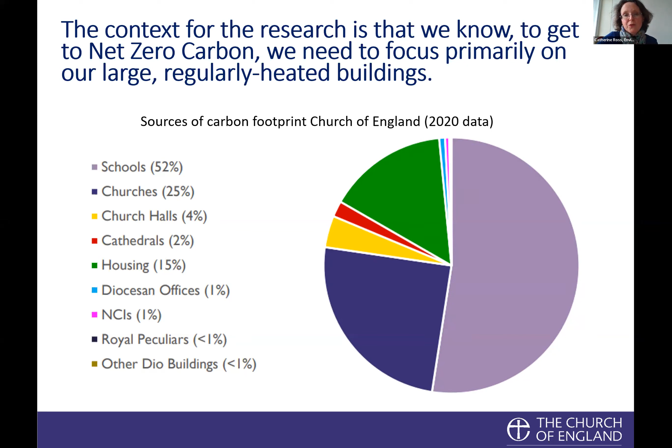Within that, it's really important to remember that the main source of our energy use is our heating. We know from this sample of churches and church halls, 84% of their energy use—that's electricity, oil and gas—was for their heating.

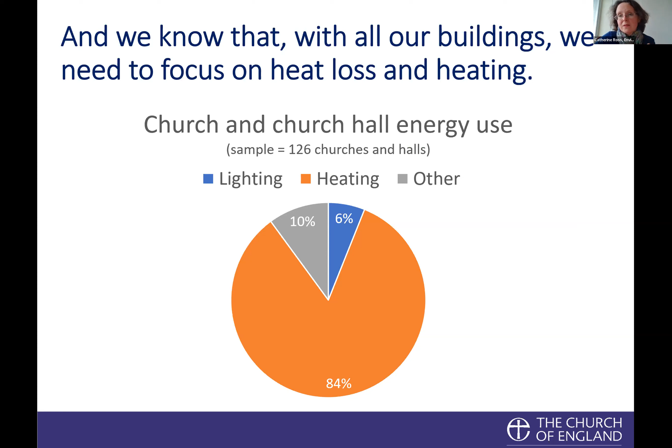All of that background knowledge about the Routemap, about needing to focus on our highest energy use buildings, needing to focus on our heat, that was what led us to start the Wayfinder project. We nationally commissioned this piece of research, commissioned by the Environment Programme and carried out by Matt and his colleagues from Inspired Efficiency.

What we did was we chose a sample of 12 buildings from around the country, which we chose because they were high energy use, big, busy buildings. We chose 3 secondary schools, 2 primary schools, 4 churches, a Theological Education Institution, and 1 of our diocesan offices. With the churches in particular, although with all of the buildings, we looked for a mixture between rural and urban, and we looked for a mixture of geography, north and south, to try and have, whilst it's a small sample, a useful and representative sample of our highest energy use buildings.

Not our typical small rural churches, deliberately looking for what are those highest energy use buildings, because we know that if we can make savings there, there'll be really material savings.

And just to really bring that point home even more strongly, bear with me. I know this is a slightly complicated slide, but it's a really important one, so I wanted to show it to you. Each of these bars is a particular building.

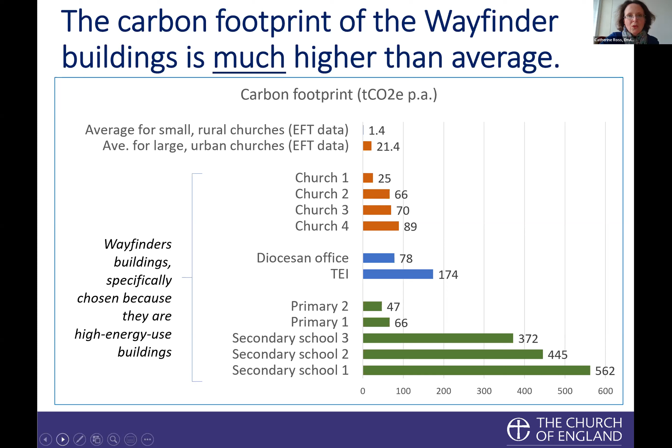That, I think, is everything from me. So if I stop sharing and hand you over to Matt to get us going. Tell us what you found out, Matt.

Excellent. Thank you, Catherine. And good afternoon to everybody who's joined. It is fantastic that so many of you have taken an hour out of your day to hear these findings, and I hope that will be a useful hour to you.

It's certainly been really interesting going around these, as Catherine says, large energy using buildings on the Church of England estate and seeing what can be done, just to get the technology to work. So this was the Wayfinders Project.

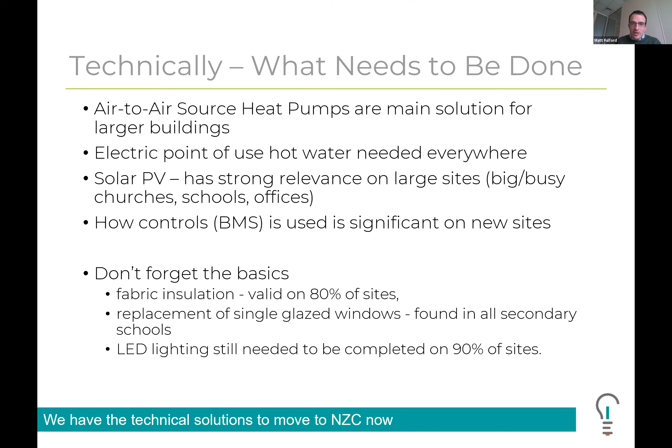So technically, that's really what needs to be done. One slide, it's maybe as simple as that, but there are obviously a lot of challenges on the way. I thought it would also be useful to touch on, actually, what did we find was less of a priority?

We were trying to look at the wider carbon footprint of the Church of England. So we did look at transport, and we were asking the sites about how people were getting to their buildings, what sort of transport they might have done during their normal operation, be that a school or the church or the college or the diocesan office. And we really found that actually the transport impact was really very minimal, possibly actually more minimal on these larger sites, which tended to be better connected to public transport than perhaps some of the smaller sites. Maybe something we need to test there.

Really the only significant elements of transport that we found which were under direct control were actually school minibuses. Most of the secondary schools have minibuses, and almost all of those were diesel minibuses. So that's definitely an area within transport to focus on. But I'd say transport overall, very minimal - a lot of people walking, cycling. You can see there the picture of the main transport for the TEI I went to, which is a very large bike store. But what also could be relevant around transport is actually making sure we've got electric vehicle charging points where they are relevant, and certainly within schools and for the staff that do need to travel and commute by car, that is relevant. But really, transport overall is not a high priority.

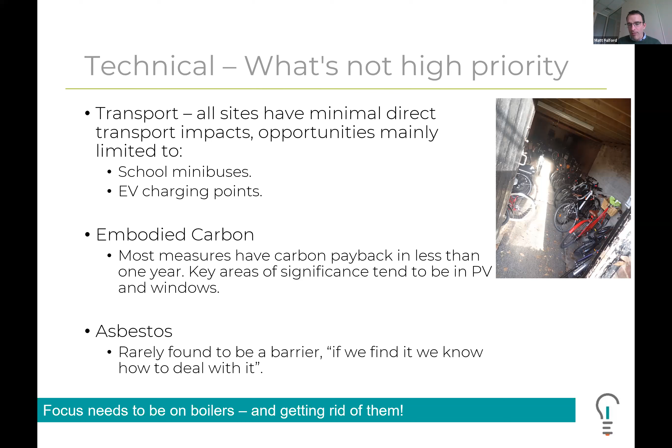So those are perhaps the things we could be a little cautious about saying we could relax on, but they're certainly not the main high priority focus. Where our focus needs to be is on the boilers and getting rid of gas and oil boilers - that's got to be our primary focus to achieving net zero.

We very much looked at what the costs were to achieve net zero within these buildings, and remember what Catherine said earlier - this is very much looking at the cost within our largest energy using buildings. This isn't our normal hundreds, thousands of small rural churches - that's not what we're looking at in this project. This is for those really big energy using buildings out there. And this isn't to make the entirety of those buildings, or in some cases campuses or estates, when looking at secondary schools, into a net zero carbon site.

So what we found, you can see the total costs. Secondary schools getting up to around £950,000 per secondary school to completely convert from where it is at the moment into net zero carbon. Primary schools, obviously much less since they're smaller, coming into about £350,000. Then diocesan offices, and actually a big, busy, daily used church, again around the £300,000 mark to do the complete replacement.

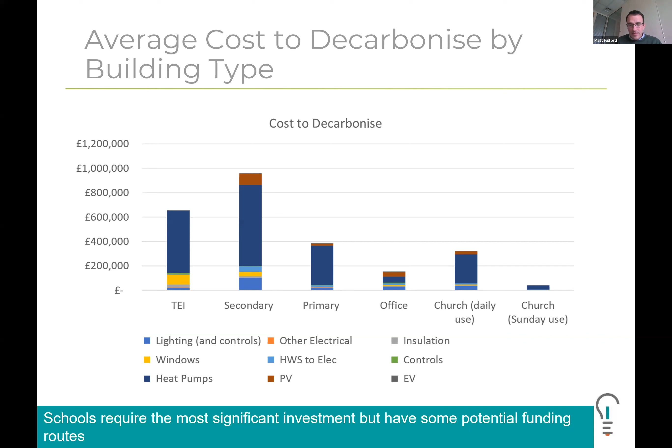But the one church we did have that was still a high energy using church, but actually mainly a Sunday used church - very much less than that, we're looking at sort of £30,000. That correlates to some other work we've done outside of this as well. So you can see there's a massive difference in the scale of that - significant investment is needed. Schools massively need the most significant investment, but fortunately they probably have some of the more reliable and potential funding routes available to them.

When we look at those costs and split them another way - rather than by building, splitting them by technology - what is it we need to spend the most money on? It's quite clear from that graph, blindingly obvious, that it's the heat pumps which are by far and away the largest element of cost where investment will be needed. The other areas, there's some money to be spent on lighting, but that's just because there's a lot of it still to do. Windows are relatively more costly than other forms of insulation, but they all very much pale in significance compared to the cost of the heat pump.

But the good news, almost, if there is any in that, is actually heat pumps are rather expensive at the moment, but are expected to fall in cost.

We're seeing, if not on a weekly basis, certainly a monthly basis, new products around heat pumps coming out all the time. Each one is incrementally better than the previous one.

We're also seeing initial signs that the skill base needed to install those is starting to increase. We've got an issue at the moment where we've got way more demand for installation of heat pumps than we have supply of skilled people. But that base, particularly existing boiler engineers, are beginning to reskill to install heat pumps. You've probably seen that anecdotally on the sides of the vans of the person that services your boiler, perhaps starting to say heat pumps on them as well.

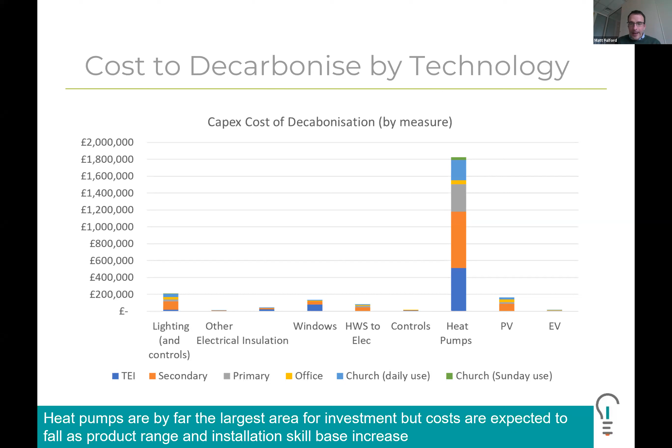So that's starting to happen, and we're expecting the costs in those areas to fall over time. It's a very high cost at the moment, and will probably always remain the most significant area for investment, but it's expected to drop over time.

The other area I wanted to look at was the cost savings, and the cost of doing it, as well as the carbon saving of doing it. The annual cost savings, where we're going to get the most financial saving from installing this, is actually within the lighting and PV. That gives us the best payback there, that's where we're going to deliver the most savings.

Heat pumps, I'll say at the moment, with the energy prices we've been paying in the last six months to a year, aren't necessarily delivering a direct financial saving in all cases - I'll come on to that later. But you can see with the graph on the right, that's where we're getting our biggest carbon saving from. So heat pumps on their own don't necessarily deliver a financial saving, but they're really massively needed to deliver the carbon saving. It's the lighting and PV that deliver the biggest cost saving, but they deliver a much lower carbon saving.

What was interesting was going back and looking at all of these buildings we looked at - every single one, when you looked at it as a complete program of measures, not just isolating out the heat pumps or the lighting on its own, but the complete range of measures needed on those buildings - every single building we went around, if you did everything, would result in a cost saving in the annual operation of that building. So there are financial savings to be had here.

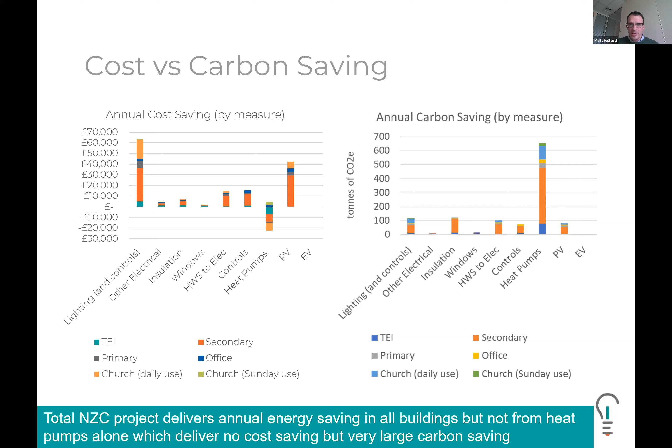Now, what was also interesting is going around and having a look at these high energy user buildings - some of them haven't really done a great deal yet, and realizing that actually we're already doing this. This isn't new stuff.

We've got biomass boilers on our estate. We've got air-to-air source heat pumps, as you can see in the picture there. We've got electric hot water heating - that's in the form of a more centralized tank, but we've got plenty of little ones stuck under sinks everywhere as well. We've got ground source heat pumps. And these aren't pictures I've just gone and found on a search engine - these are all pictures I took whilst doing the 12 energy audits of this sample of sites. These exist even in these sample sites we were looking at on the Wayfinders program.

So this technology may sound new and novel to many people, but actually we're already doing it. We don't always realize that what's heating or cooling that building could be described as a heat pump, or that the hot water from the tap in that classroom or sink is heated by electricity, and that's a good thing. It's out there, we're doing it, this is known and common to many people, and perhaps we need to shine a greater spotlight on where we're doing it and doing it well.

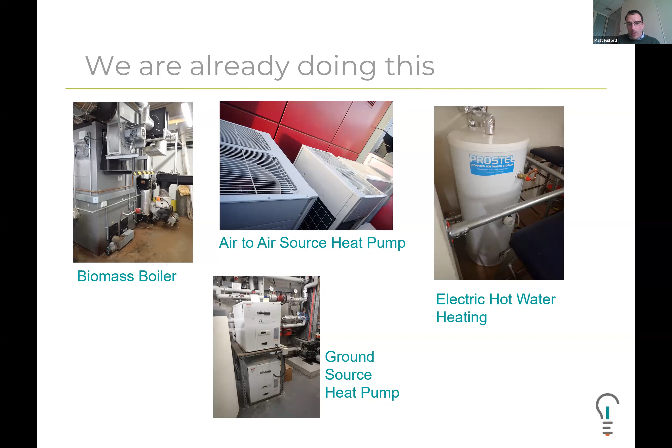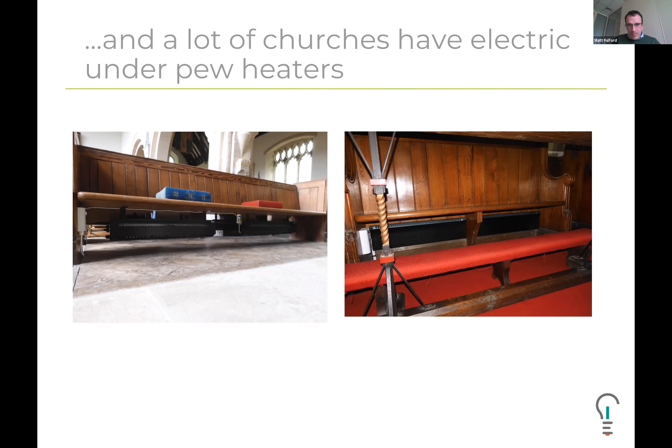I just wanted to mention, we've got a lot of churches that have electric under-pew heating, and that's what we're seeing as needed for the smaller churches out there. That one Sunday-used church we had in the programme, this would be the most suitable heating solution for it. So as well as all the bigger stuff in our larger energy-using buildings, we also have solutions for the smaller ones, and these examples are fairly widely distributed around our church estate for going electric heating.

So we can do this, we've got the technology to do it. In fact, it delivers a cost saving when we do it, albeit we may have some long paybacks within there. And we're already doing it on parts of our estate, we already have the knowledge. So then the question arises, well, why aren't we doing this everywhere?

This was another area we very much examined with the sites we went round to, asking what the barriers were. Initially, all of the sites had heard of the 2030 net zero carbon target the Church of England set, and every single site was really supportive and engaged around that. They all want to do their bit. There's a quote from one church saying there's no lack of will and determination to do this. So I think in many cases, the hearts and minds piece is an open door, we've probably won that battle if we put it in those terms.

It doesn't seem to be that people are going, oh no, I don't want to do that, I'm not interested. People seem to be very interested around it, and I think that's a testament to how many people have actually joined today's webinar. You're clearly interested in this, and that's very much what we found.

The biggest issue, and I suppose this won't be a surprise to anybody, is how do we pay for this? So I think that's really useful to hear from Catherine about the funding webinars coming up, because that was by far and away the biggest issue. Many people across all ranges of buildings go, give me the money, we'll do it tomorrow. Now, obviously, they'll probably need to go and fundraise rather than just be given that money parachuted into them. But that was clearly the biggest issue out there, financing it.

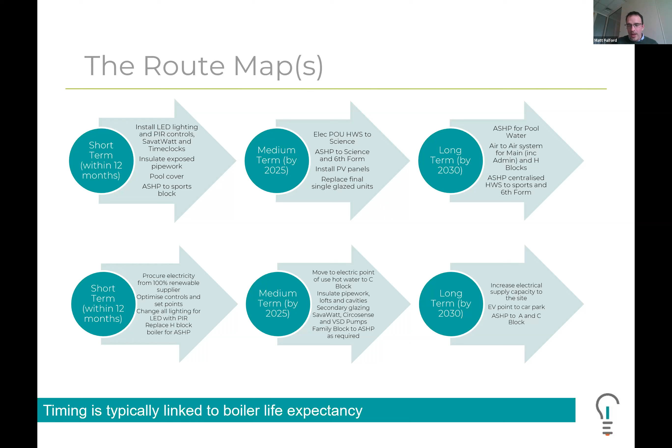So it's when that boiler needs replacing that is the main driver out there. There are some human barriers as well, so this is where we need to work very much with people rather than with the buildings. I've talked about those competing priorities and the lack of budget, but also having that clear technical knowledge of what needs to be done.

Now, obviously, we've delivered that for these 12 sites. They've got those route maps you saw on the previous slide, and they've got an audit report that very much says what needs to be done. So they now can go forward and say, look, when that boiler fails, I know I need to replace it with this solution here, I need to do that bit beforehand, and they have that route map going out there. But that's clearly a bit of knowledge that needs to be put in place.

And another confidence piece is knowing that it's going to get the support of the diocese, be that within the DAC or within the schools teams, that yes, this is something we want to support and we'll help you through that. And knowing that there are funding solutions out there, those are really the bits that are needed. Many people would love to have that pot of money just given to them, but even when you unpick it, knowing that it can be funded and these are the funding solutions - yes, you've got to go and work hard at the fundraising, but those routes are available and open to them.

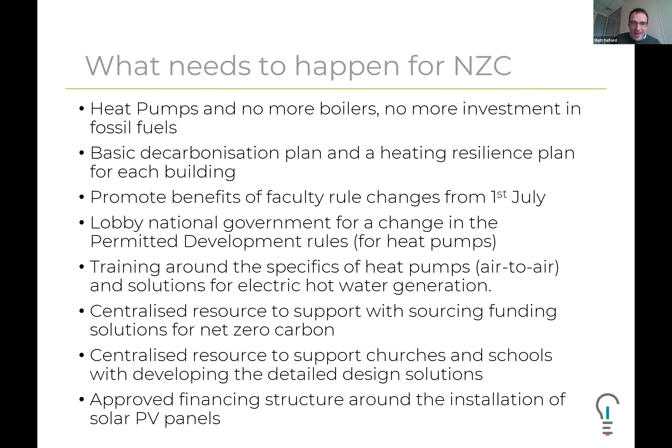One of the things I said we particularly needed to do was get some training around the specifics of heat pumps. So I thought, well, there's no time like the present - I've got you for about the next 5 minutes to run through very quickly some awareness around heat pumps and what they are.

You've probably heard of heat pumps, and you've probably heard of ground source heat pumps, which involves stuff going into the ground. You've probably heard of air source heat pumps. What you probably haven't heard of is that there are different flavors of those in between.

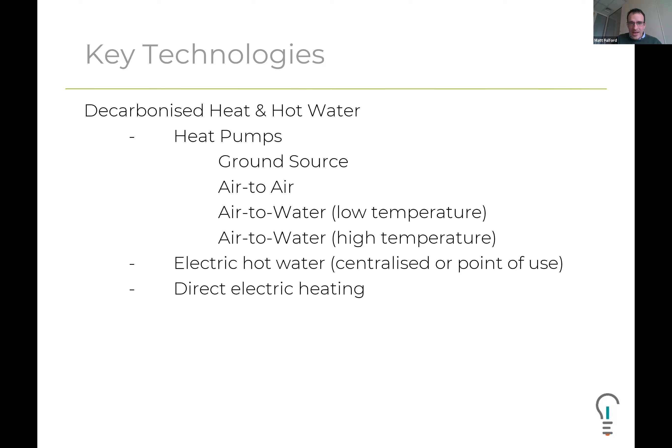So very quickly: ground source heat pump. You have something that goes into the ground - often now it's a deep drill down in piles - which extracts the heat out of the ground, compresses that, and puts that heat into the building. It works really well with underfloor heating systems and in new buildings, but it's incredibly difficult to get into existing buildings, particularly our churches, which have ground with lots of archaeology in them. So perhaps not so good for that.

Now, all heat pumps have a measure of how efficient they are, called the coefficient of performance, abbreviated to COP. That's measured over a whole heating season or a whole year, so it becomes a seasonal coefficient of performance, or SCOP. That is a ratio of how many units of electricity you need to put into the heat pump to get how many units of heat out.

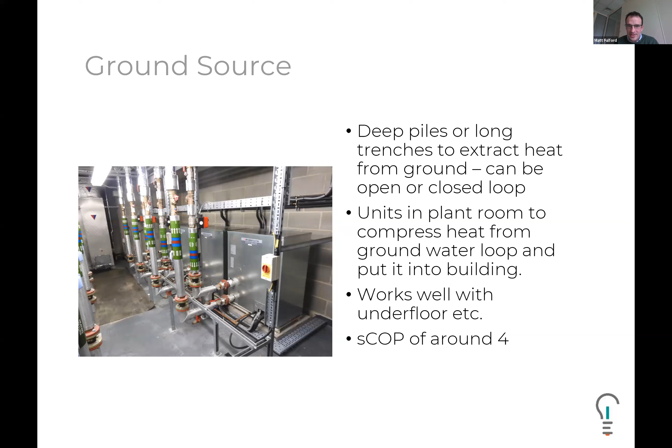So if you give it 1 unit of electricity, the pump does its wonderful stuff, and with a ground source heat pump you'll get 4 units of heat out for that 1 unit of electricity you put in. So that's a coefficient of performance of 4 - in other words, 400% efficient. Compare that to a gas boiler, and even the best gas boilers are only about 95% efficient. This is 400% efficient, so you can understand why it's a good and well-promoted technology.

Then we look at air-to-air source heat pumps. I said this is really probably the mainstay of what we need to be doing. This is what they look like on the outside of a building - they probably look familiar because you recognize them as air conditioning systems. Most air conditioning systems can heat as well as cool, and this is what these do. They're very, very similar - in fact, almost exactly identical to air conditioning systems.

When you install an air-to-air source heat pump, there are just a few technical little bits of control system on it, which means that it heats as its main thing and cools as its secondary thing, rather than the other way around. But basically, they are exactly the same.

They take heat out of the air, they compress it into a refrigerant gas at the external unit. They put that refrigerant gas into the building, and then you have units inside the building that can push that heat into there.

The coefficient of performance around that is 5, so even more efficient than ground source, so 500% efficient. They can also cool. That's quite important actually for a number of our schools where they do suffer from overheating on a few days in the summer as well.

Because they also have blown air, they can rapidly warm up spaces. So they've got a warm-up period of around about 20 minutes into most rooms. If you think about a classroom or a hall, probably a little bit longer for very large churches, because they've got greater air volume. The external units, you can see here, there's one on the flat roof of a school, or they can go down at ground level and be covered up, as long as they've got airflow through them.

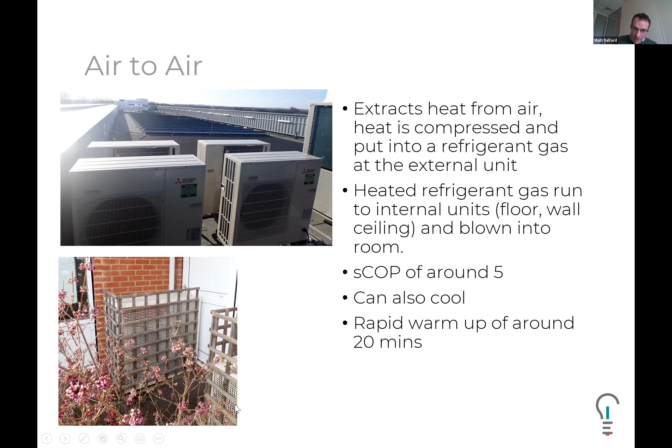This is a unit, and you've got another one just off the edge of this picture, actually the primary school that we went to there.

Internally, a lot of people worry about what they look like internally, because you'll be very used to seeing these sorts of systems, the plastic white boxes on the wall with the little louvers that move in and out, or actually hidden up behind suspended ceilings. And these are very relevant actually for our schools.

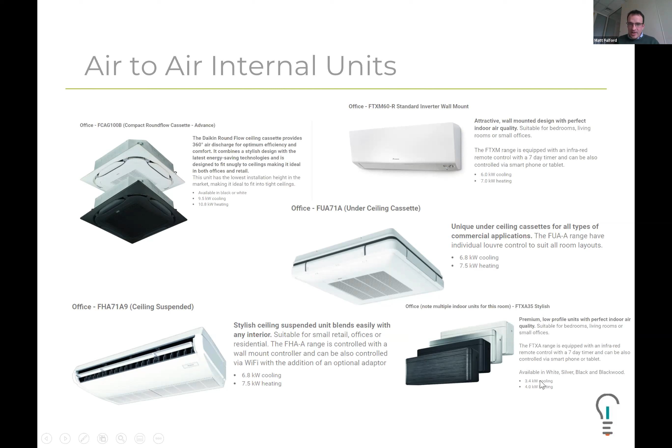These sorts of solutions hidden up in suspended ceilings work really well. In little offices, these things again fit in quite nicely. You can get some more elegant looking units now, which just look a little bit nicer as well. But it doesn't all have to be the horrible lump of white plastic stuck on the wall.

We can also get internal units for air-to-air systems which are floor mounted and look very much like fan convector radiators. So you probably walked into that building, into this room, and thought that was just a normal radiator on the wall. In fact, that's the internal unit of an air-to-air heat pump. So that's available - you can see different makes, different models out there.

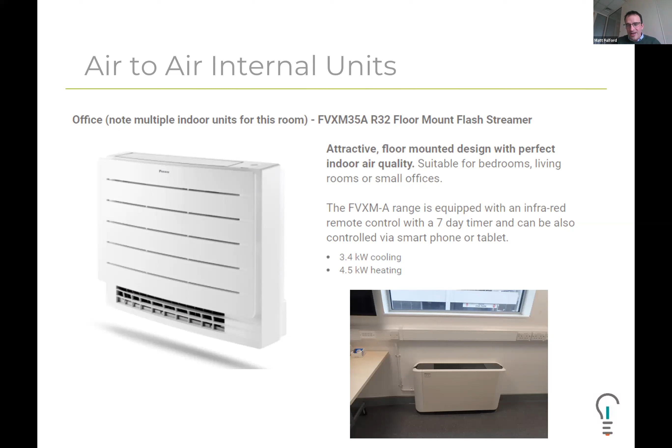So they don't need to look much different from a radiator. And that's quite important when we come into churches, those large churches where they may already have radiators down the wall, and we can replace them with these without the appearance changing massively.

Air to water, very quickly on that - this again is an air-to-water system installed at a school. That takes the heat out of the air, and it compresses that heat, but rather than putting it into a refrigerant gas, which is what the air-to-air system did, it puts it directly into the water system that then circulates around radiators. It's very good at producing water up to around about 50 degrees.

After that, a normal air-to-water system will struggle a little bit. You need good flow rates around a heating system. So if you've got small bore pipework, or single pipe systems, which we do still have, they ain't going to work. They need to have much better flow rates within that.

Most of the plant is outside. You can see here, very minimal plant inside - just a bit of pipework and a few pumps and a few control panels on the walls. No major plant inside at all, which can sometimes be helpful.

But actually their coefficient of performance is much less - so that's about 3.5, about 350% efficient. Compare that to air-to-air, which is 500%. You can see why air-to-air is perhaps coming to be more relevant.

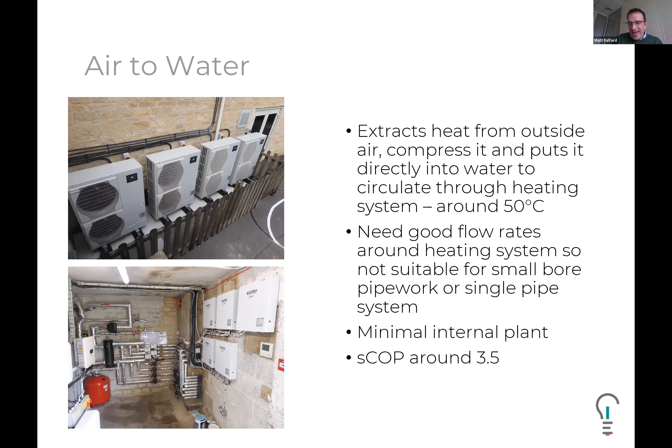You can have high temperature air-to-water systems. One of the major failures on the earlier one was actually it only produced water up to around 50 degrees, and within a lot of our radiator systems, we need hot water that's hotter than that.

So you can get high temperature air-to-water systems that produce water up to about 75 degrees. It's got a secondary cycle, so it almost goes through two versions of compressing the heat within the heat pump part, but that reduces its efficiency, bringing it down to about 2.5, or 250% efficient.

It is easier to integrate with existing radiator systems, but it does need internal and external space because you've got two elements going on: the heat pump itself, and the internal unit which gives a secondary boost to get that temperature up. So you need both going on, and they do tend to be rather more expensive as well.

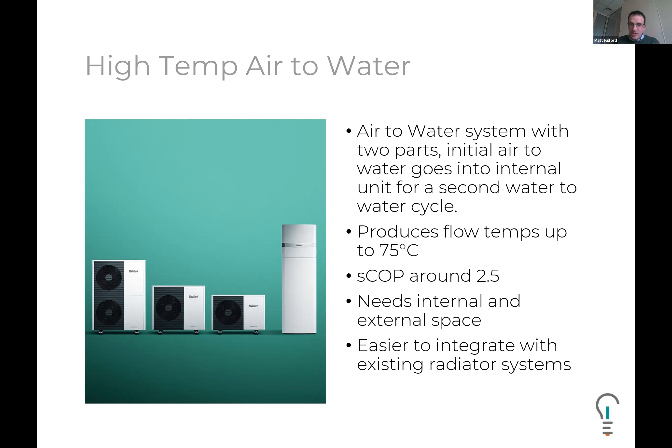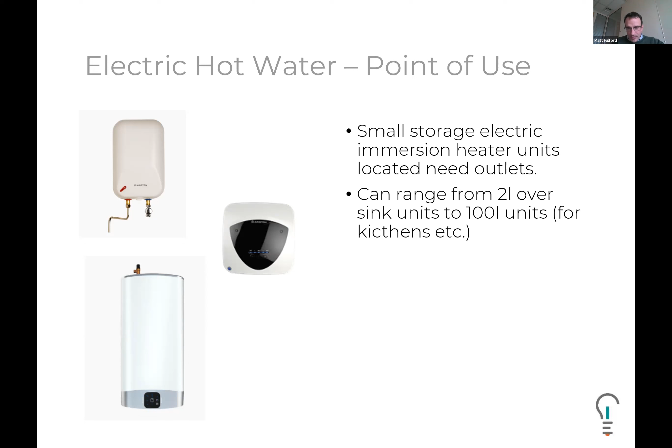So they're still relevant, still part of our toolkit, but less efficient and more expensive. Electric point of use hot water heaters, you've probably seen them - this is what we need to have everywhere. These units, hidden underneath sinks, range from just a few litres, useful for a wash hand basin or small sink, up to 100 litres, much more ideal for big commercial kitchens in schools and offices and the like.

You can also get instantaneous ones that just heat the water as it flows through with no storage at all, which is obviously very good for Legionella.

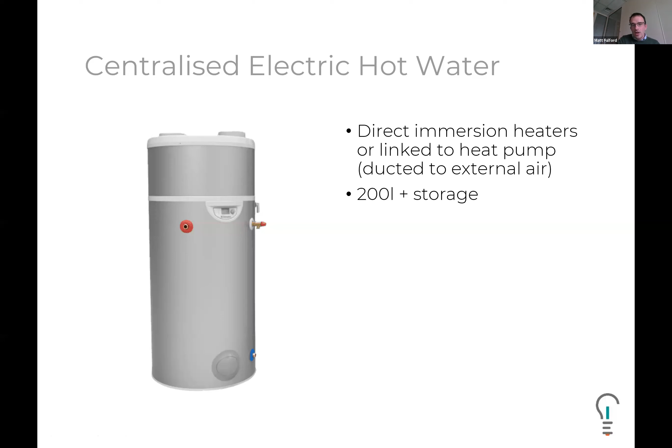And you can now get centralized electric hot water systems as well - a normal tank as we're used to seeing, but the top section of the tank, just above that light grey line, is actually an air source heat pump. So you've got a packaged unit, a cylinder of hot water with an air source heat pump on top of it, ducted in the same way as a flue would go out to external air. That can go directly into plant rooms, which is really useful where we've got lots of showering going on, like in sports blocks, and we need a large volume of stored hot water. So we've got those solutions out there as well.

So I thought I'd just run through that very quickly. Hopefully you'll forgive me for taking a few minutes at the end to go through that familiarization of heat pumps.

Just as a reminder, even with the broad range of buildings we've got, the range of ages, listings, styles and everything else, we've got the technical solutions - I've just described those main ones that we need to deliver net zero carbon. We can do it today. Technically, they also deliver cost savings as well. Yes, there are some barriers we need to work through, but by working together, I think that's really going to be a solution we can get there, and 2030 is achievable.

I hope that helps. I think we're now going to go into many questions, and I can see some already out there.

Thank you so much, Matt - so much information there, so much insight that you brought from the reviews you've done.

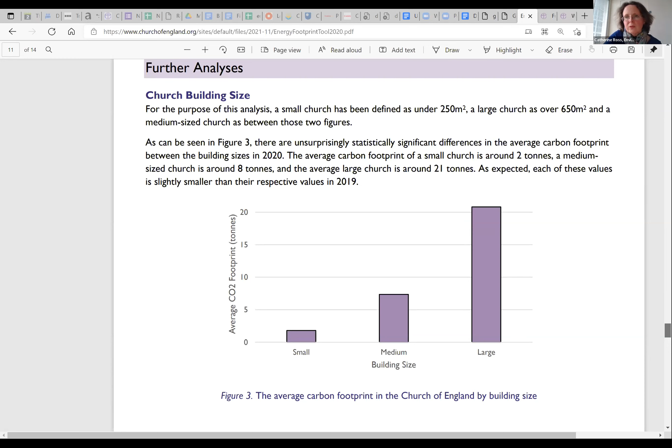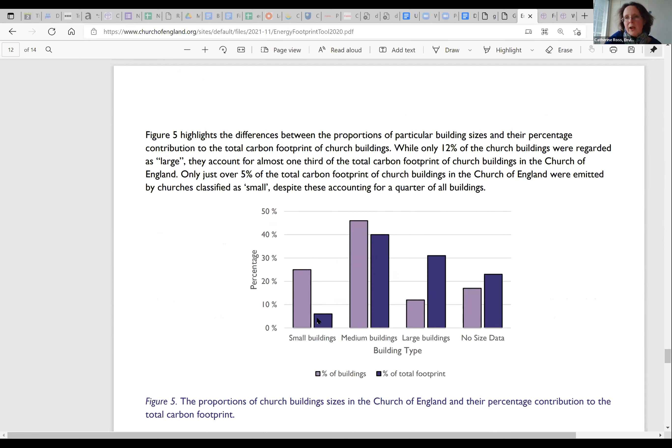So this is the average carbon footprint of the small, medium, and large church. And then it goes on here - this is the percentage of the buildings in paler purple, and the percentage of the total carbon footprint from all the churches in darker purple. You can see that around 25% of churches are small, and collectively they make up around 5% of the carbon footprint of our churches. I always think this chart is particularly important - it's rural and urban, small to large. That's making the point again that I made in the introduction, that the main causes of our carbon emissions, and therefore the main place action is needed, are not our thousands of small, particularly small rural churches that already have a really low carbon footprint.

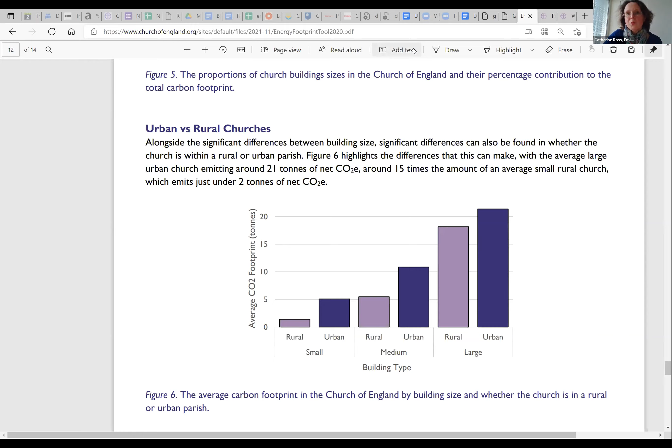The next question says, please could you comment on the recent increase in energy prices? I imagine we only know as much about that as any member of the public would from reading the news. As energy prices go up, it makes some of these interventions pay back much more quickly. But equally, it's such a difficult time for so many churches, and for every part of the church really, as energy bills are going up.

I think it's got to be said that we are going to see some huge increases in energy prices. Domestically we've got a massive increase coming in the cap, but it is still a cap, and that is still holding domestic energy prices down. You'll read in the media about commercial energy prices as well as domestic ones, and commercial energy prices are going up even more than domestic ones, which the shock that's causing is going to be considerable. I don't think anybody can rejoice for one moment about the impact that's going to have, even though it probably will focus minds more on energy efficiency.

There's a really important dynamic, however, with heat pumps, and if I may just take a minute or two and do a few numbers. There are two ratios that are really important, and you probably noticed on one of the graphs that heat pumps didn't really pay back very well, and in some circumstances they cost more to run than a good efficient gas boiler.